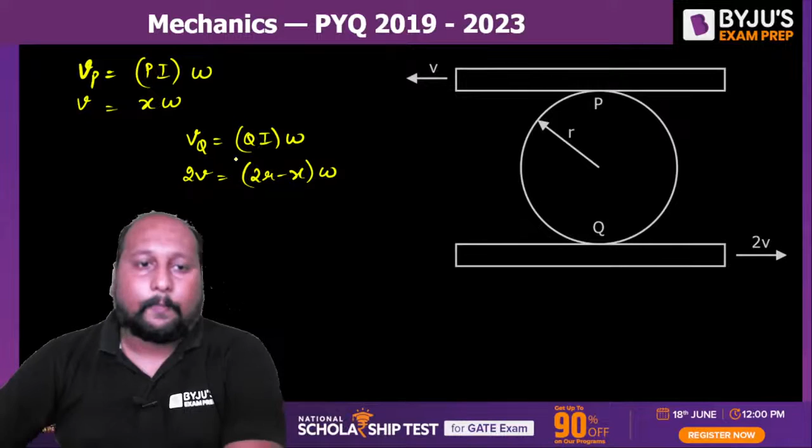And similarly we can say velocity at point Q is 2V, this is your point Q, so Qi into omega. What is Qi? This will be 2r minus X, into omega, and VQ is twice of V. If you take these two ratios, this V will cancel out and you will be getting the value of X.

So let us take the ratio: V by 2V is equal to X into omega divided by 2R minus X. Let us find out where this X will be located. So I can say 2R minus X is equal to 2X. So here we can say X is equal to 2R by 3.

So we got the value of the I-centre from the top portion. Now it's a very easy question. If the top plate and bottom plate have the same velocity, then the I-centre will be exactly at the center point. But because the top and bottom points are not having equal velocity, the I-centre has shifted from the center position.

So we got this X value, so we can simply say V is equal to X into omega. So omega is equal to V by X, so this is 3V by 2R. 3V by 2R is the angular velocity of this particular disk. Option C is the correct answer. Is this clear? A simple question from the concept of your I-centre.

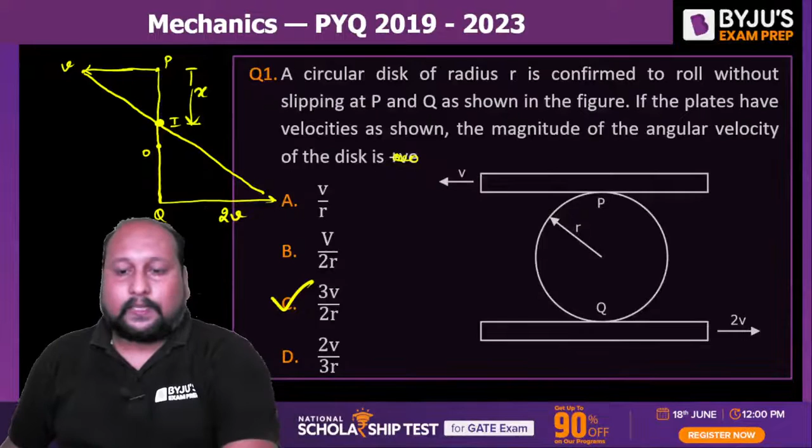Chaliye, second question on the screen. An attempt is made to pull a roller of weight W over a curb that is stepped by applying a horizontal force F as shown in the figure. The coefficient of static friction between the roller and the ground, including the edge of the step, is mu. Identify the correct free body diagram of the roller when the roller is just about to climb over the step. So you have to identify, there are 4 diagrams being given. What will be the correct free body diagram?

Now here it is clearly stated that it is about to climb, that means we can apply the condition of static equilibrium. So which one will be giving us the correct representation of the free body diagram? Option A, B, C, or D? Now it is clearly mentioned that it is at static equilibrium, so definitely can we say that at the hinge point, we'll be having this reaction force.

There's a reaction force R and a weight W acting, so there are 3 forces acting. Simply we can say option C is the correct answer: the reaction force, the applied force F, and the weight W is the correct representation.

We'll be having a normal reaction at this point, which will pass through the center. Because this body is about to climb, we can say this is a condition of static equilibrium. Is this clear, understood? The correct representation is option C.

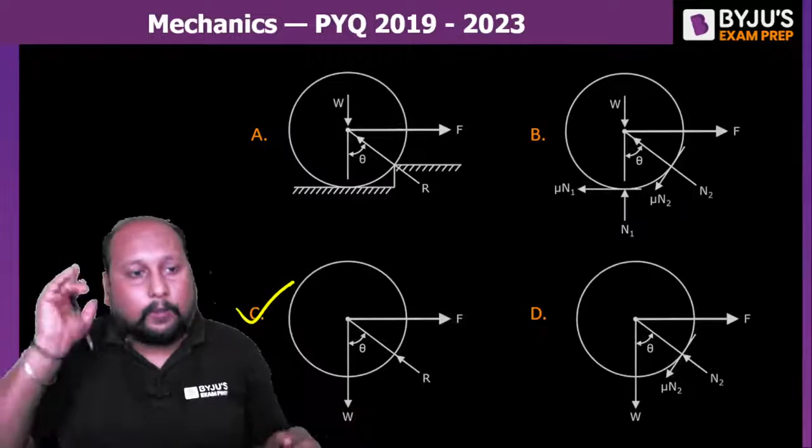Let us proceed to the next question. A beam of negligible mass is hinged at support P and has a roller support at point Q. A point load of 1200 Newton is applied at point R, so there is a force of 1200 Newton at this point. What is the magnitude of the reaction force at point Q? You have to calculate this.

Let us say this is the reaction force RQ, at the roller support. This is a 1 mark question. So tell me quickly, what will be the reaction force RQ? Anyone?

What will be the reaction force RQ? Now we need to calculate the RQ. If you take the moment about point P and make it equal to 0, because this entire body is in equilibrium, we can get the value of this.

So what is this distance? That is 5, so 1200 into 5. RQ, what is this height? That is equal to 4. This is clockwise, this is anti-clockwise, this is RQ into 4. So from here, the reaction at point Q comes out to be 1500 Newton. Are we getting this 1500?

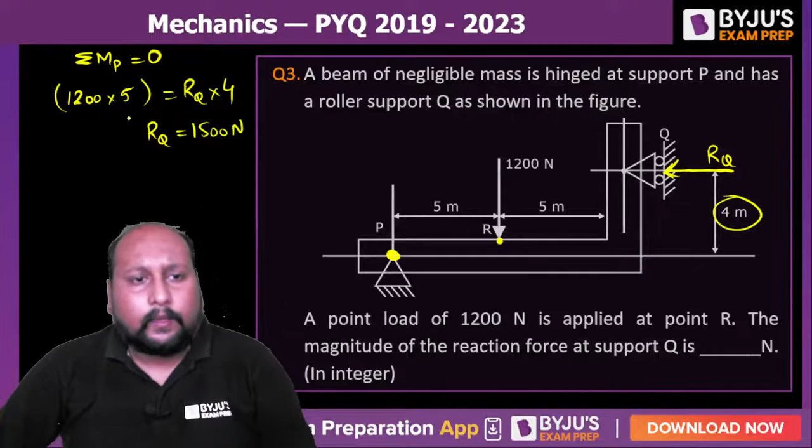1 mark question, 1 mark question. So the reaction at point Q is 1500 Newton. Simple question asked in 2020. Is this clear? Everyone, please do let me know.

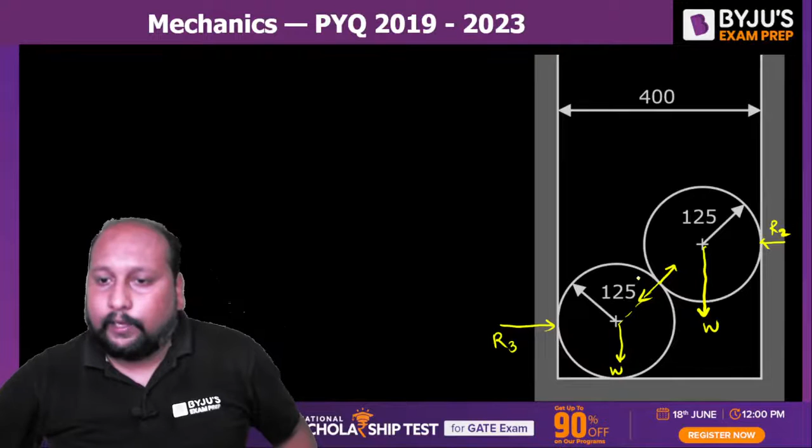So we need to calculate this magnitude of R1, the reaction between the two spheres. The reaction at the point of contact between the two spheres is what we have to calculate, meaning we need the value of R1. How do we do this? Simple - draw the free body diagram, apply Lami's theorem, and get the answer. Let's try this.

Let's try this. Let's say this is sphere A, this is sphere B. If I draw the free body diagram of sphere A, there is a weight W acting downward, a reaction force R2, and a reaction force R1 acting. But I also need to calculate this angle.

What will be the total distance here? This one is 125, this one is also 125, so total distance will be 400 minus 250, which will be the base, and the hypotenuse is 250.

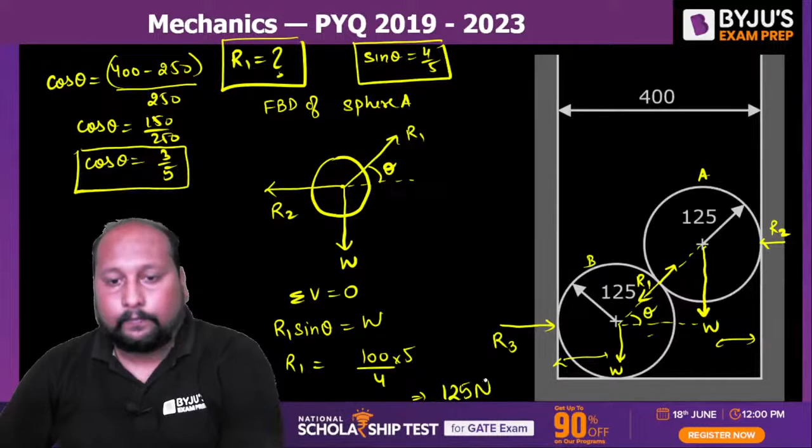Are we getting this, 125 Newton everyone? 125 Newton is the final correct answer. That means the reaction at the point of contact between the two spheres is equal to 125 Newton, and they asked to round off to 1 decimal, but since we get an integer, it's perfect.

Clear? Proceed. Let us proceed to the next question, question number 5 on the screen.

Many times you get easy questions from trusses, and this is one of the easiest. The figure shows an idealized plane truss. If a horizontal force of 300 Newton is applied at point A, we are applying this force at point A. What is the magnitude of the force produced in member CD? You have to calculate the force in this member.

Quickly, what will be the value? Anyone? This is a question which was asked in GATE 2020 for 1 mark.

Whenever you get a truss question, the important concept to remember is to identify any joint where 3 forces are acting. If you visualize at point B, there are 3 forces acting, with 2 collinear forces. If this is point B, this is FAB, this is FBD, and this is FBC. As I've told in previous sessions, whenever a joint has 3 forces where 2 are collinear, the third non-collinear force will always be equal to 0.

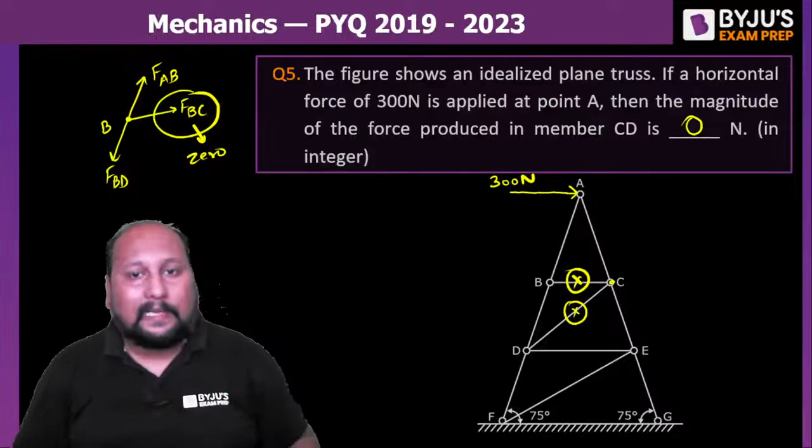All clear? The answer is 0 Newton, and moreover if you try to extend, how many zero force members are there? We have BC, we have CD, DE is also a zero force member, and EF is also 0. So there are 4 members which are zero force.

This is an extension to the discussion of this problem. This NAT problem is a very easy question, its member force in CD is 0. Clear hai? This 0 is too bold, dark ho gaya jada. Okay, chaliye next question.

Question number 6 on the screen. The members carrying 0 force in a truss shown in the figure for any load P greater than 0, with non-appreciable deformation of the truss, that means it's a rigid truss with no deformation happening.

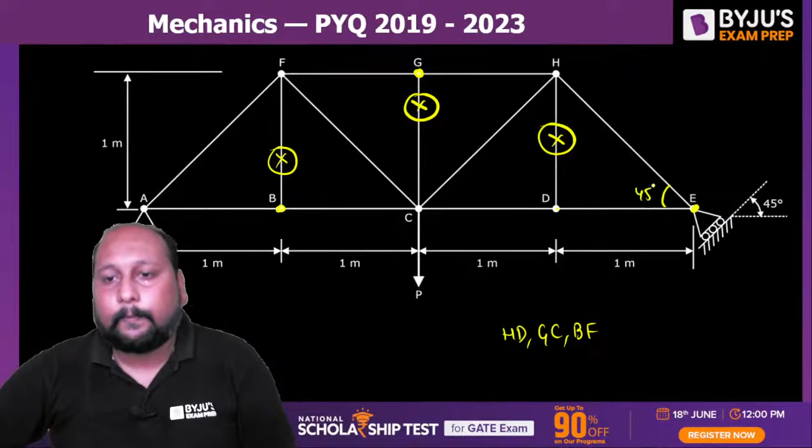Now, if you try to concentrate on joint E, this height and base make 45 degrees, so this is also 45. The height of this truss is 1 meter, and DE length is 1 meter, so the angle made by the member HE with DE is 45, and this support is also making an angle of 45. So can we say the reaction, since this is a roller support with a single reaction, the reaction at point E will be along the HE line?

Okay, so I can simply say if all the reaction force goes toward HE, then DE will be a zero force member. If DE is a zero force member, DE is equal to CD, so this is also a zero force member.

Okay, fine. Is this clear? So now we have DE and CD being added to the zero force members list.

What about the other members? You'll be saying, sir, can we go for GF and GH? If you talk about GF and GH, these are not zero force. These both are equal, but they are not zero force members.

Because why is GF not zero? If you take joint A, AB is non-zero, AF is non-zero. If AF is non-zero, definitely FC and GF will be non-zero. And at point C, this is non-zero, so we can say this is also non-zero.

So in total, we are having 5 members as zero force members: HD, GC, BF, DE, and CD. That is option C. Option C is the correct answer.

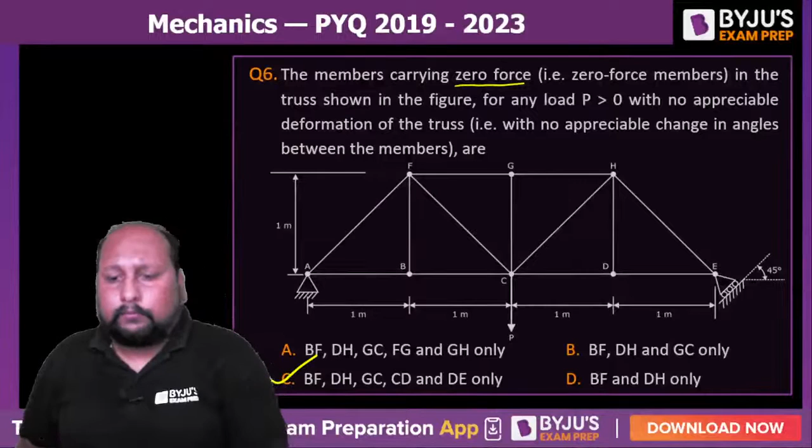Let's move to the next question, question number 7. A plane truss PQRS where PQ and QR are having equal length and PQR is making an angle of 90 degrees as shown in the figure. The force in the members PR and RS respectively are what we need to find.

Can you tell me what will be the answer? Quickly, are you able to see this diagram? Let me hide myself. Quickly, what will be the force in the members PR and RS respectively? Simple question, yes, a simple question.

Now, whenever you get a question from trusses like this, there are two methods we can apply. Either we go for method of joint or method of section. Whenever there are intermediate forces acting, go for method of section. It's the best way, and we'll easily be able to solve the question.

So if you go for method of section, now the challenge is, sir, where do we cut the section? Before cutting the section, if you concentrate at point Q, only two forces are acting there, no applied load, and both forces are perpendicular. Can we say these two are zero force members?

Can we say these two forces, PQ and QR, are zero force? And if these are zero force, now we can take the section like this and remove the bottom portion.

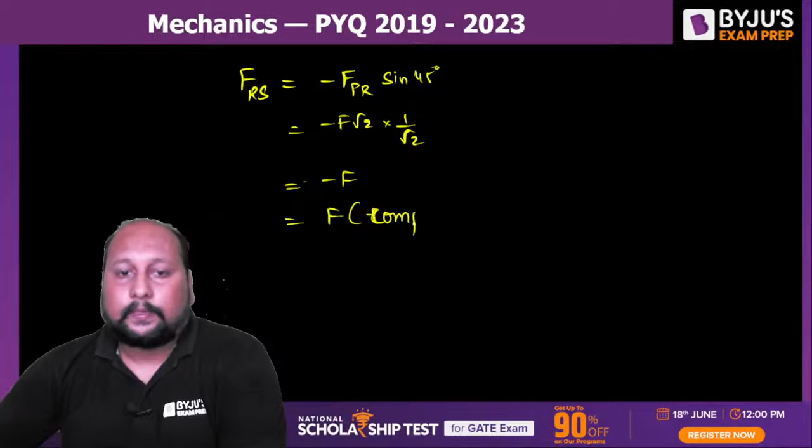So from here, the force in the RS member is equal to minus FPR sine of 45. sin 45 is 1 upon root 2, that is minus F root 2 into 1 upon root 2, that is minus F, that means F is compressive in nature. Minus means compressive, okay fine.

So RS is minus F, compressive. Option D is the correct answer. So the force in member PR is F root 2 tensile, and the force in member RS is F compressive, because we got a negative sign.

Clear? Done? Yes, anyone having any doubt? These are very easy questions, let's go. Now let's proceed. See, mechanics is a subject - if you know the concept, you will never ever have any difficulty. Right? If your concepts are strong, no problem with that. Okay fine, and if your concepts are not strong, then it is a very difficult subject. Let's move to the next question.

Question number 8 on the screen. A block, oh this is a very easy question, you all can tell me within a fraction of 10 seconds I think. A block of mass 10 kg rests on a horizontal surface. The acceleration due to gravity is 9.81 meter per second square. The coefficient of static friction between the floor and the block is 0.2, that means mu value is given as 0.2. A horizontal force of 10 Newton is applied on the block. What is the magnitude of the friction force on the block?

What is the magnitude of this friction force? Definitely this is the direction of friction force, right? This is the weight, that is 10g, and this is your normal reaction. Okay quickly, what will be the magnitude of the friction force? First let us try to understand, are we talking about a static condition or a dynamic condition? For that, let us calculate the limiting value.

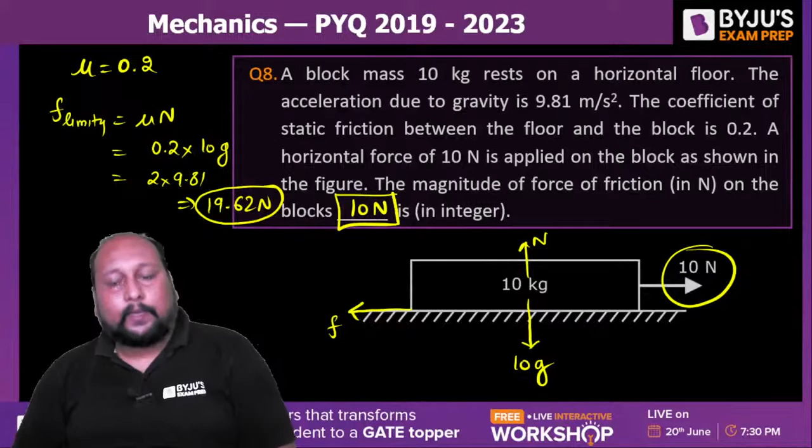Okay clear? Yes, because we know that if you try to draw the graph between the applied force and the friction force - this is the limiting point, right? This is the limiting point and this is dynamic. We are talking about this point, 10 Newton applied, friction is also 10 Newton.

Okay, question number 8 done. Question number 9 on the screen, a very easy question. A block of negligible mass rests on a surface that is inclined at 30 degrees to the horizontal. When a vertical force of 900 Newton and a horizontal force of 750 Newton is applied, make sure the block is having negligible mass. What should be the coefficient of static friction between the block and the surface? Very easy question, apply and tell me what is the answer.

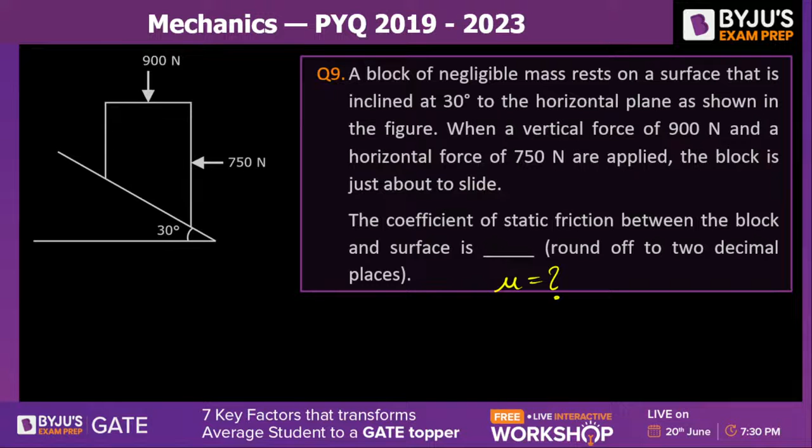Quickly, what is the value of this coefficient of static friction? This is a very easy question guys. Let's try this, now let us draw the FBD. Let us draw the FBD - this will be the normal reaction, something like this. Now tell me one thing, 0.83, okay anyone else who has solved this? One second guys, anyone else who has solved this question?

Yes, 0.83, anyone else who has given me? Let's try this question, it's easy. Now first of all tell me what will be the direction of friction.

See, the block is not having any mass, only the applied force is acting. So tell me what will be the direction of friction. For that we have to see what is the magnitude of these forces.

So let us resolve this along the inclination. This will be 750, this is 30. So 750 cos 30, and downward will be 750 sin 30.

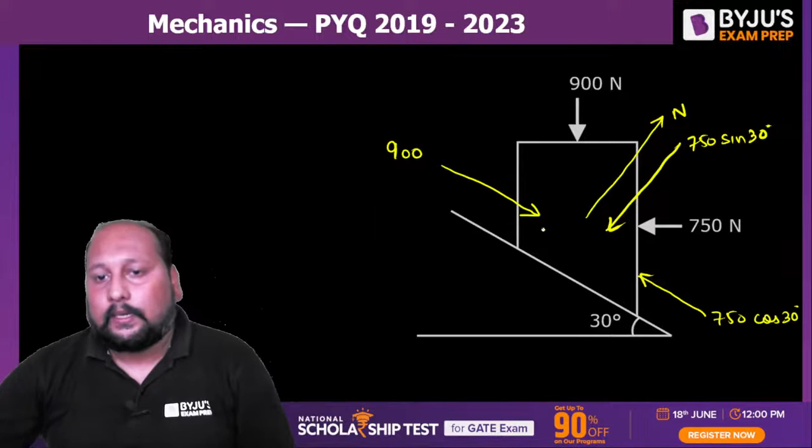Similarly, we are having 900 along this direction. This is 900, now this is 30. So what will be this value? This angle will be 30, this is also 30, so this is sin 30. Okay, sin 30, and this one is downward direction, 900 cos 30. Okay, so I have resolved all the forces.

So tell me, by seeing the magnitude of these two forces, what will be the direction of friction? Quickly, tell me. Now if you see 900 sin 30 is 450 Newton, somewhere around 450. Let's try to find out what's the value of 750 cos 30.

So this is 649. That means the net force is in the upward direction. If net force is upward, that means the direction of friction will be downward. This is the direction of friction. Is this clear? See, here's where mistakes happen in identifying the direction of friction.

Sin 30 is 1/2, 450 Newton force downward, down the inclination. 750 cos 30 is somewhere around 650 Newton, which is upward. So definitely there's a total force acting in the upward direction. So the opposite to the direction of motion will be the friction force. So now you can easily calculate.

So I can say the normal reaction will be equal to 900 cos 30 plus 750 sin 30. Okay, fine. So from here let us calculate this value: 900 cos 30 plus 750 sin 30. Okay, so this is coming out to be 1154.42 Newton. Now if I talk about the frictional force, because F is equal to mu into N, we have to calculate the value of mu.

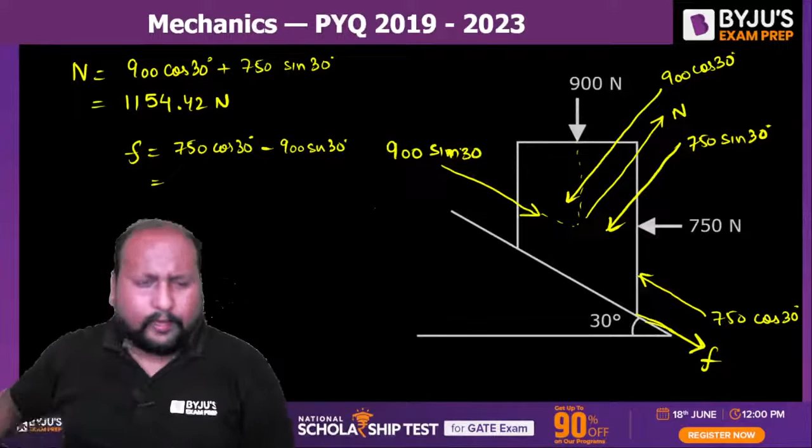So I can say friction force will be equal to 750 cos 30 minus 900 sin 30. Let's calculate this magnitude. 750 cos 30 minus 450, that is coming out to be 200, somewhere around 200. 199 means 200, 199.52 Newton. Okay, so F is equal to mu into N.

Mu is equal to F by N, just we have to place it. 199.52 divided by 1154.42, somewhere around, what's the value? It is 0.1728, round off to 3 decimals, 0.173 is the final correct answer.

0.173 is the final correct answer. Okay, so the answer is 0.17. Is this clear? Anyone having any doubts? Surya, is this clear? 0.17. Okay, to 2 decimals, 0.173 is the correct answer. 0.17 we can mark it.

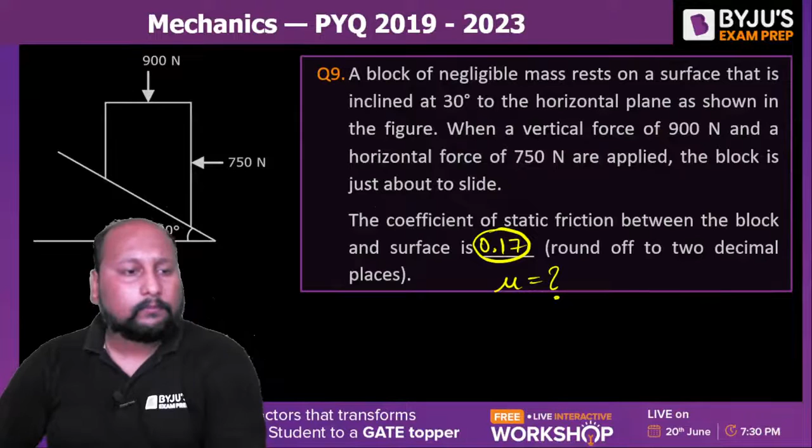Here we have to apply the conservation of energy, because whatever kinetic energy we are providing is converted into potential energy, as we are stretching that particular cord by a distance of 0.4 meters. So we can apply the concept of conservation of energy and solve it, and let's see what is the answer.

Okay, so applying the conservation of energy: whatever is the total kinetic energy, if I take this as the total kinetic energy plus the total potential energy, is exactly equal to the total kinetic energy plus the total potential energy. So this is half into m into v square is equal to half into k into x square.

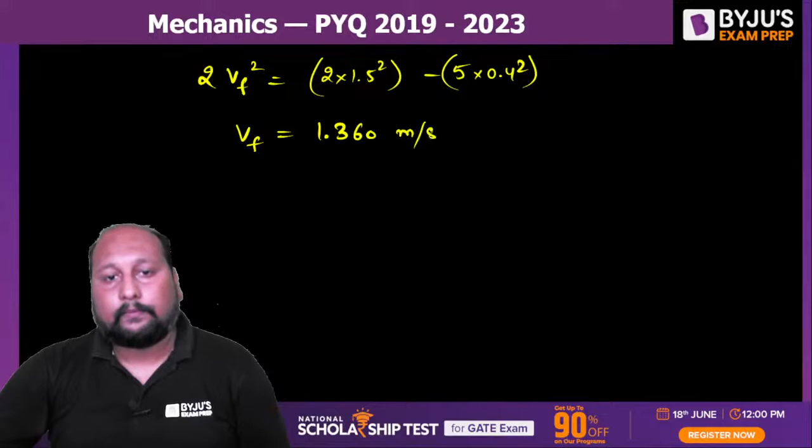So I think option A is the correct answer. Option A is the correct answer. Okay, fine, clear hai? Option A is the correct answer. Simple, we have to apply the energy conservation and get the final result.

Chaliye, very good. Next question on the screen, question 11. Arey, bahut easy. This is also, when I was, the easy question.

The wheels and the axle system lying on a rough surface. Rough means there's a friction we need to take into consideration. So there is a wheel and an axle. Two wheels are connected, and in between it is an axle. So the question is, each wheel has a diameter of 0.8 meter and a mass of 1 kg. Assume that the mass of the wheel is concentrated at the rim. That means we are talking about the wheel as a rim type. Neglect the mass of the spokes.

Diameter of the axle is 0.2 and its mass is 1.5 kg. Okay, so the axle has a mass of 1.5 kg and diameter of 0.2. Neglect the moment of inertia of the axle. Assume g is equal to 9.8. The effort of 10 Newton is applied on the axle in the horizontal direction as shown in the midspan. Okay, this effort is applied. Assume that the wheels move on the horizontal surface without slip. What is the acceleration of the axle system in horizontal direction?

Simple question, it's a very easy question. If you try to visualize, the mass of each wheel is 1 kg. There are two wheels being connected, so the total mass of the wheels will be equal to 2 into 1, that is 2 kgs, and the mass of the axle is equal to 1.5 kg. So the total mass of the system will be equal to 2 plus 1.5, that is 3.5 kg. If I take the entire system to be a single system, we have a total of 3.5 kg, right? So now we can apply the simple concept.

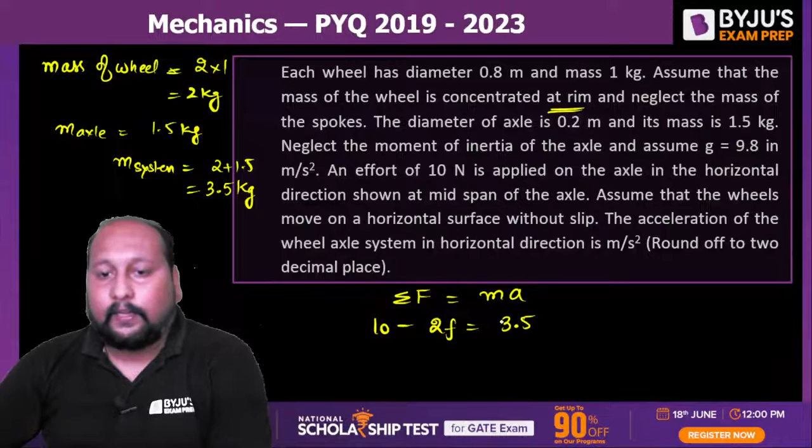So can we say that the total force acting on this body is equal to mass into acceleration? Now what's the total force? 10 Newton is the force acting in the horizontal direction, minus — now there are two wheels, a friction force created over here, friction force created over here — that is minus 2F is equal to mass into A, 3.5 into A. So 10 minus 2F is equal to 3.5 into A.

A, can I write as R into alpha? Right, what is the radius? Diameter is 0.8, so radius will be 0.4. So 3.5 into 0.4 into alpha equals 10 minus 2F. So after this we are getting one equation: 10 minus 2F is equal to 3.5 into 0.4, that is 1.4 alpha. Let us say this is equation number 1.

Alpha is angular acceleration. Okay, now if you try to apply the moment, the torque equation — this is the frictional force, and this is the force acting, 10 Newton force. This is 0.1 meter, I think 0.1 meter only. Yeah, 0.2 meter is the axle, so 0.1 meter. So I can say the total torque acting is equal to I into alpha.

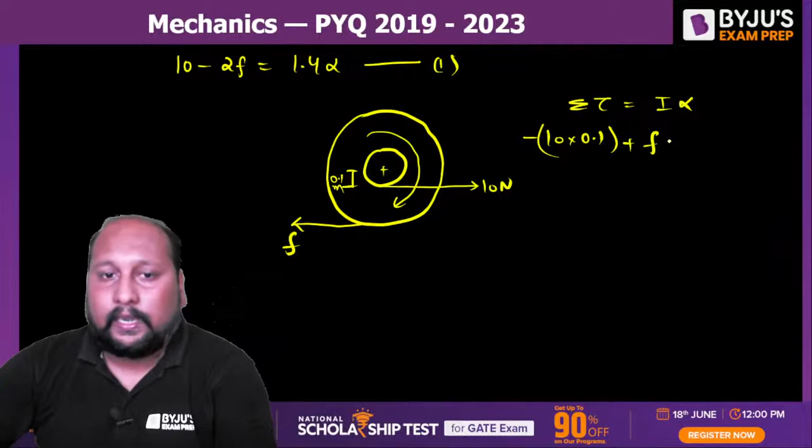What's the total torque acting? This is the direction of motion. So I can say the 10 Newton will be creating an anti-clockwise movement. So this is minus 10 into 0.1 plus F into radius 0.4, that is equal to I into alpha. I is, since this is a disc...

Right, this is a rim, they have already stated this. So we can say mr square, and because there are two wheels, we can say 2 into mr square into alpha.

So this will be minus 1 plus 0.4f is equal to 2 into mass is 1 kg, radius is 0.4 square into alpha. So this is equal to 0.4f minus 1 equal to 0.16, 0.32 alpha. That's equation number 2.

Can we solve these two equations to get the value of f and alpha? This is equation number 1, this is equation number 2. Solving these two equations, we get the value of friction is equal to 2.61 Newton, and the angular acceleration comes out to be, when you place this value, 3.409.

Yes, John Philip, 3.409 radian per second square. Okay fine, so we got the value of friction, we got the value of alpha.

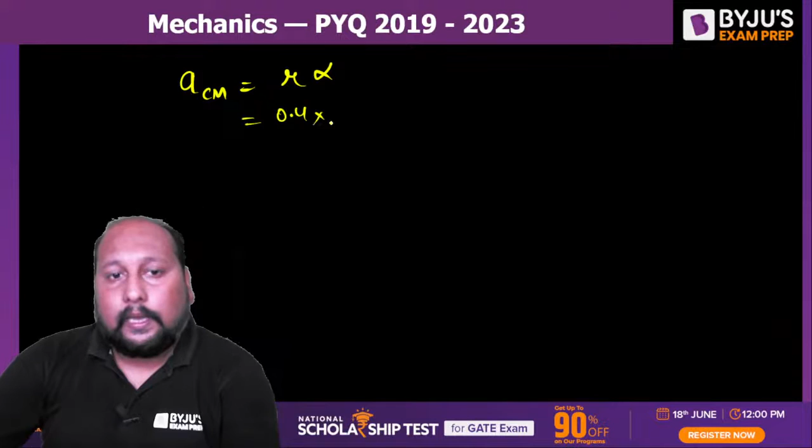Question is, what is the acceleration of the axle? So in the horizontal direction, that means what is the acceleration of the center of mass? That is equal to R into alpha. R is 0.4, alpha is 3.409. Let's calculate and tell me what's the answer.

Till then, let me clarify the doubt of John Philip.

1.3636 meter per second square.

Are we getting this? Sir, how are NIT, Trichy, Surathkal and Warangal compared to new IITs like BHU?

Now, if you see the latest NIRF ranking, you will get complete clarity. The government released an NIRF ranking 2 weeks back, and you can see research-based ranking, overall institute ranking, different categories. Based on that, you can get a clear idea. If you want to see a research-oriented institute, you can sort it according to research.

NIT Trichy is the topmost. I can rather say Trichy, Surathkal, and Warangal, these three are the top NITs, much better than the new IITs. In terms of placement only, I'm saying, not talking about research based. Research based also is good, but in terms of placement, these are much better than the new IITs.

But last 2 years, the trend is slightly shifting. Some new IITs have done marvelous work, so their ranking has improved in a great way. So new IITs try to work on placement because they want to improve their ranking. So it's not too bad to get into a new IIT, but yes, you have to compare with these three NITs according to the ranking.

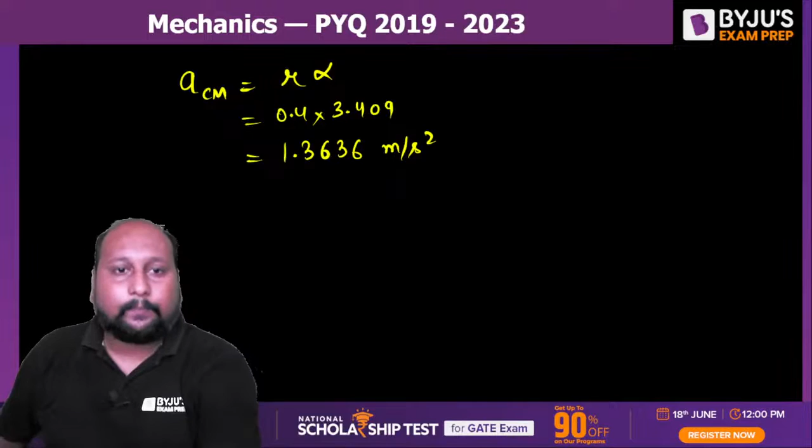Okay fine, chaliye, next question on the screen. I hope this is clear. The answer, down to 2 decimals, is 1.36 meter per second square.

Next question. A ball of mass 3 kg moving with a velocity of 4 meter per second undergoes a perfectly elastic direct central impact with a stationary ball of mass m. So we have a ball of mass 3 kg moving at 4 meter per second, having a perfect elastic collision with mass m initially at stationary. After the impact is over, the kinetic energy of the 3 kg ball is 6 joule. What is the possible value of this mass m?

Can you tell me what could be the possible value? This is an MCQ, not an MSQ problem. What is the possible value of this mass m?

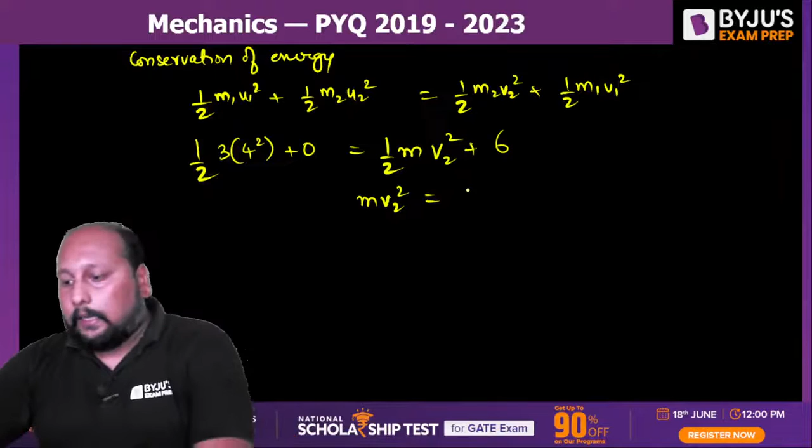16 into 3 minus 6, let's check. Are we getting this? mv square, 3 into v square. We have to have that half also, or else we won't get the correct answer. So this is 48, that's 54. Are we getting this 36? 16 into 3 is 48, divided by, this is 24, 24 minus 6 is 18, 18 into 2, 36. Yes, this is 36. So this is equation number 2.

So this is equation number 1, but the thing is, in equation number 1 we have 3 unknown variables, and in equation number 2 we have 2 unknown variables. So how can we proceed? What we can do is write instead of this, 3v1 plus mv2 is equal to 12, as equation number 1. We have to calculate the value of mass m, so we have to frame a quadratic equation.

One more thing, we are having a direct perfect elastic collision. Can we say e equals 1 is equal to v2 minus v1 divided by u1 minus u2? So v2 minus v1 is equal to u1, which is 4. So this is equation number 3. Let me write v2 is equal to v1 plus 4. This is equation number 3, and this is equation number 1.

So what we can do is place this value into this equation and frame the equation out. Let's eliminate v1. V1 is equal to v2 minus 4. Placing this here, 3 into (v2 minus 4) plus m into v2 is equal to 12. So we can solve this.

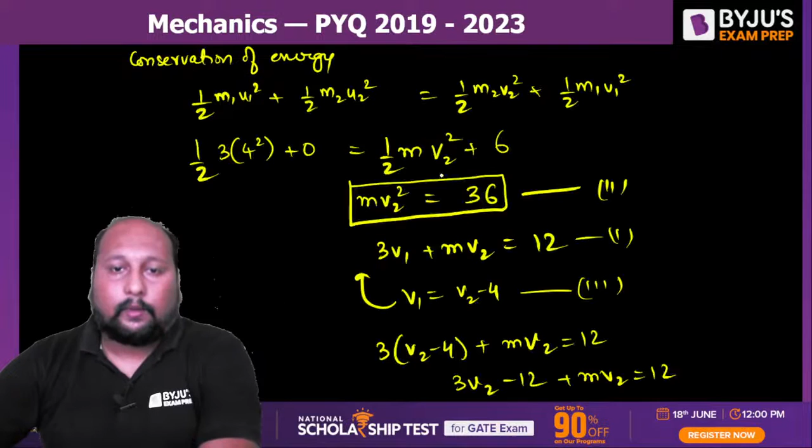36 by m is equal to 24 square by 3 plus m, right? So this is 6, this is 4, and this gets cancelled out. So ultimately we'll be framing one equation, we can square this one too. We'll be getting a quadratic equation: m square plus 9 plus 6m, into 36, is equal to 24 into 24 into m.

So this is 4, that is 16. So we can say m square minus 10m plus 9 equal to 0. So m square minus 9m minus m plus 9 equal to 0. So (m minus 9) into (m minus 1) equal to 0. So mass is equal to 9 and 1 kgs. We are getting two values, 9 and 1 kgs.

So option B is the correct answer. Is this clear, everyone? 9 and 1 kgs is the final correct answer to this problem.

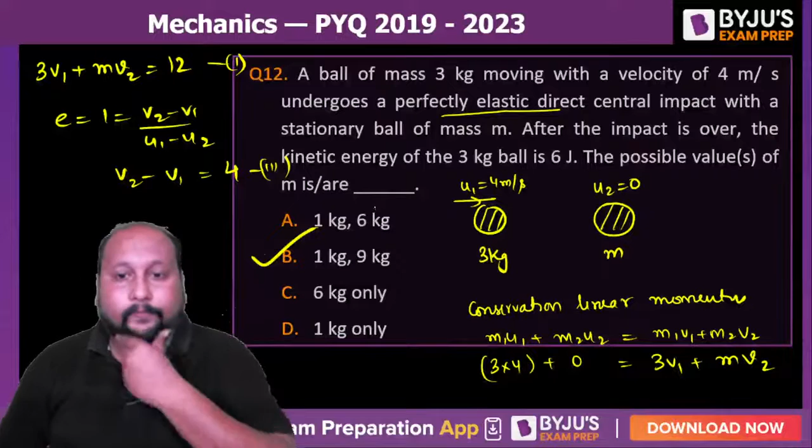Again, this is a question where we have to apply conservation of momentum and conservation of energy. A rigid block of mass m, 10 kg, having velocity of 2 meter per second, strikes a stationary mass of 30 kg after traveling 1 meter along a frictionless horizontal surface as shown in the figure. The two masses stick together and jointly move a further distance of 0.2 meter along the same frictionless surface before they touch a massless buffer connected to a rigid vertical wall by a linear spring with spring constant 10 to the power 5. What is the maximum deflection of the spring in centimeters?

That means the combined M1 and M2 collectively moves and hits this spring — what is the maximum deflection happening in this spring? Very simple: we have to apply the concept of conservation of momentum, and we can also apply conservation of energy. Both can be applied. Let us first apply conservation of momentum because we need to identify the velocity with which this combined body will be hitting the surface. Let us apply the conservation of momentum.

Let us apply the conservation of linear momentum. Initially this is at zero velocity, so we can say m1 v naught plus m2 into 0, and since they are sticking together, this will be equal to (m1 plus m2) into velocity v.

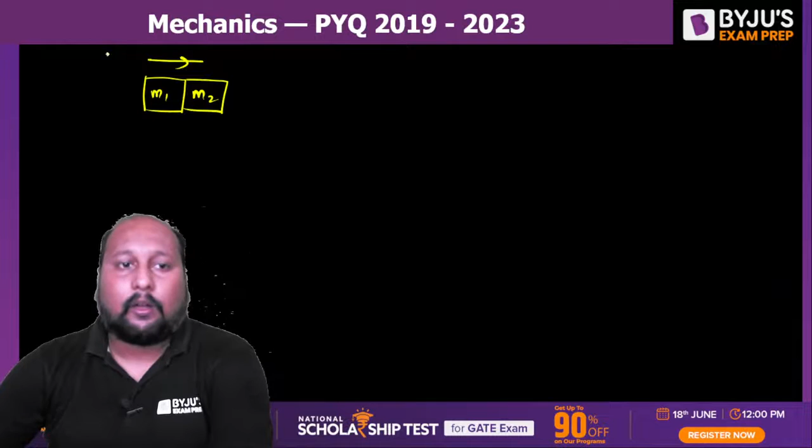The entire combined mass m1 and m2 is moving with a velocity of 1 by 2 meter per second and hitting this spring surface. When they hit, all the kinetic energy will be converted into potential energy stored in the spring.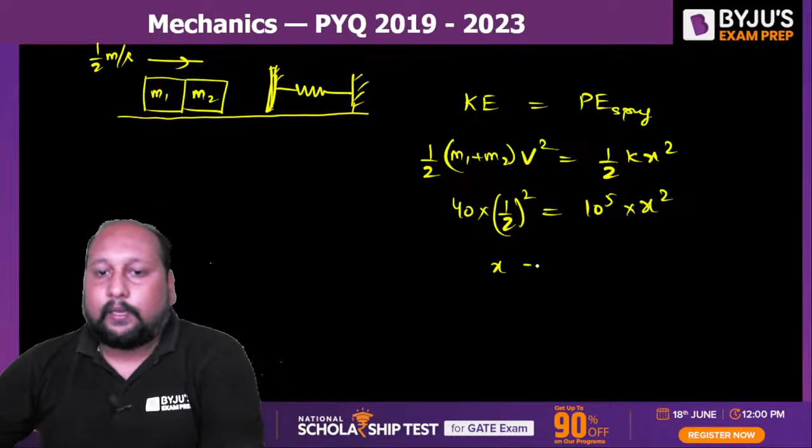So the total kinetic energy equals the potential energy stored in the spring: half into (m1 plus m2) into v square equals half into k into x square. So (m1 plus m2) is 40, v is 1 by 2 whole square, equals k value 10 to the power 5 into x square. From here, x square equals 4 into 10 divided by 10 to the power 5, which is 10 to the power minus 4, so x equals 10 to the power minus 2 meter. They are asking for the value in centimeters, so that's 1 centimeter. The maximum deflection in the spring will be 1 centimeter.

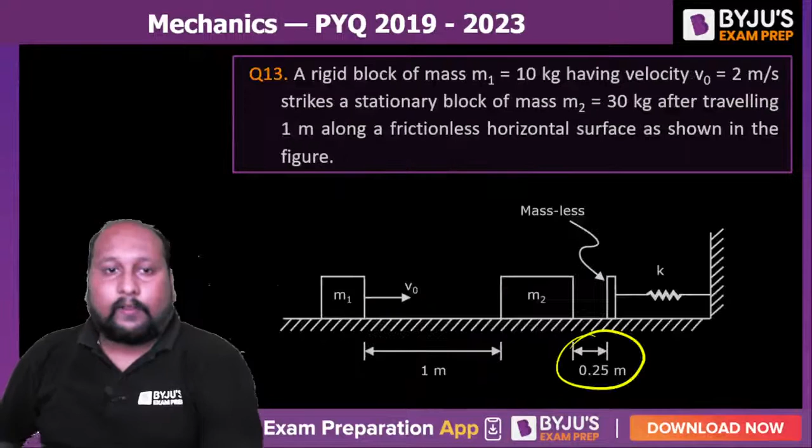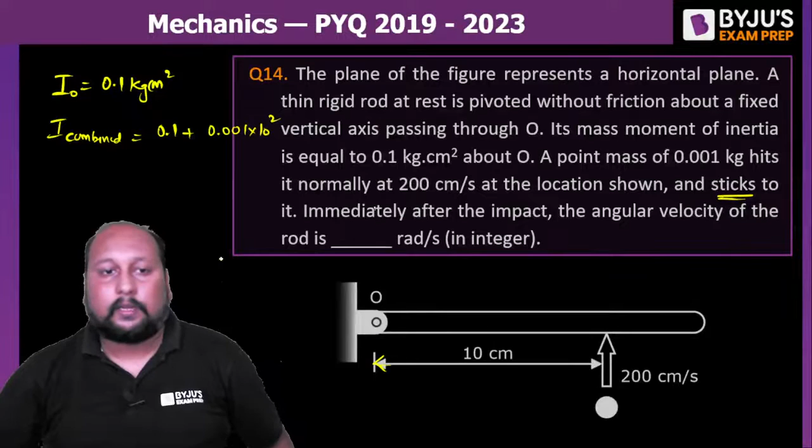So solving this, it will be 100, 0.2. This is 0.2 kg centimeter square. So I got the moment of inertia of the combined body. It is sticking, okay, so I got that value.

Now we can apply the law of conservation of angular momentum. Applying the law of conservation of angular momentum, it's basically m into v into r is equal to whatever your momentum, angular momentum that was with this particular mass, after hitting it will be transferred, that is equal to the combined moment of inertia into omega.

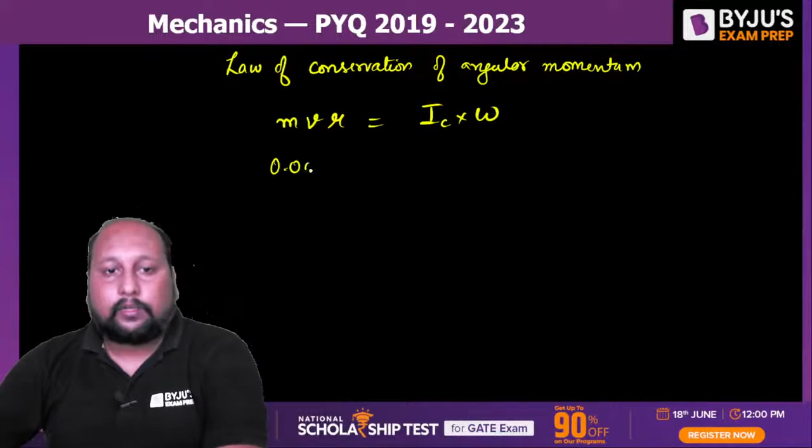Yes, so what's the mass? That is 0.001, velocity is 200, radius is 10, combined moment of inertia is 0.2 into omega. So omega value, quickly, what is the value you're getting? Anyone who has tried this, solve this, tell me. What is the value of omega? Simple calculation, guys, one second.

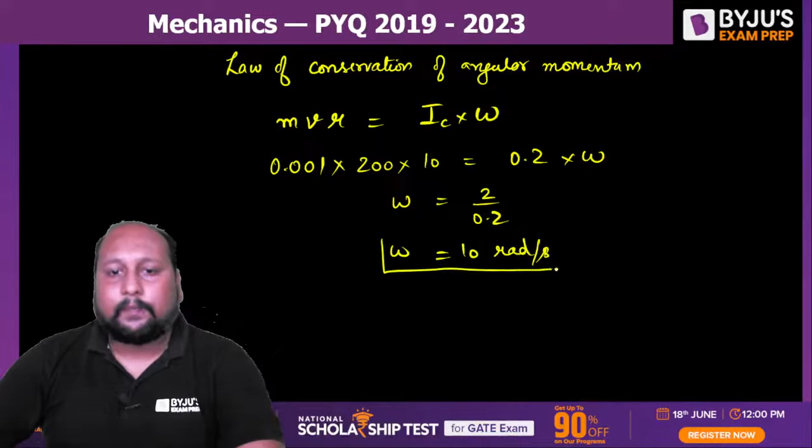Are we getting the angular velocity as 10 radian per second? Everyone? 10 radian per second is the final correct answer. This is 10 because they're asking in integer only. So 10 radian per second is the final correct answer.

Okay, fine. Chalo, question number 15 on the screen. A structure along with the loads applied on it is shown in the figure. The self weight of all the members is negligible and all pins are frictionless. AE is a single member.

Try to visualize, it's not that, this is a single member. AE is a single member which contains a pin C. Likewise, BE also a single member, right, that contains point D. The member GI and FH are overlapping rigid members. The magnitude of the force carried by CI, what is the force in the CI member?

Now, let us suppose if this AE is not a single member, if I say AC and CE were different members, then CI was a zero force member. But as your AC and CE is basically a single member only, that is the reason we cannot say directly that this is a zero force member. We have to do the analysis, right?

So now again the truss problem, what we have to do? We got truss problem, we have to go for method of section, right? So now let us try to take the method of section, try to cut the section from here. CI we need to calculate, right? Let's cut the section from here, or else we can cut the section from here also. Better we can cut the section from here, it will be much more easier.

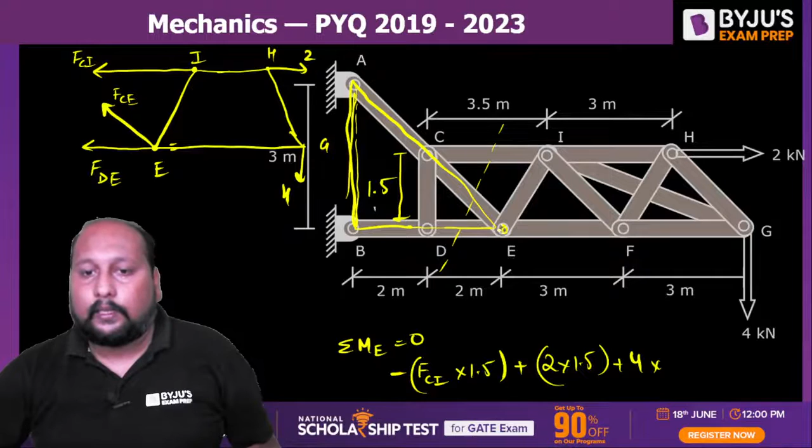So FCI into 1.5, this is in the anti-clockwise direction, plus 2 into 1.5 clockwise direction, plus 4 into this point, 3 plus 3 is 6, equal to 0. So solving this, FCI is equal to 24 plus 3, 27, 27 divided by 1.5, that is equal to 9 by 0.5.

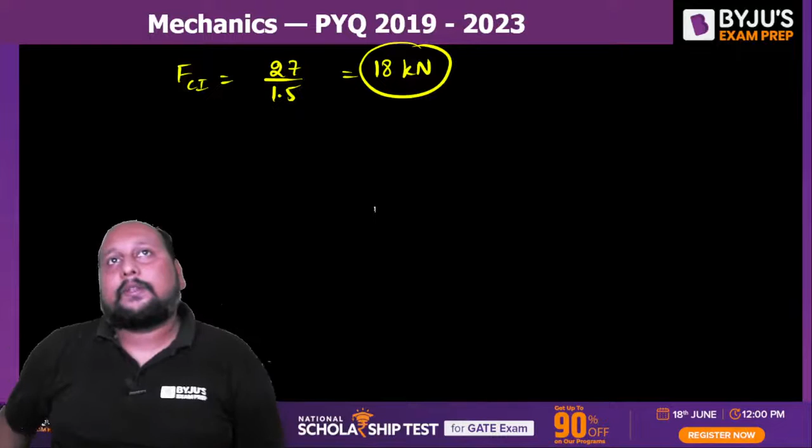That is 18 kilonewton. Are you getting 18 kilonewton? 90 divided by 5 is 18. So the answer for this is 18 kilonewton is a correct answer. Clear hai? Okay.

Chaliye, perfect. Question number 16 on the screen. Two rigid massless rods PR and RQ are joined at the frictionless pin - so I can say pin at R. So R is a frictionless pin joint resting on P and Q respectively, as shown in the figure.

The vertical force acts on the pin as shown in the figure. When that included angle is less than 90, the rod remains in static equilibrium due to Coulomb's friction between the rods and the ground at location P and Q. When theta is equal to 90, we are having an impending slip - that means we are having impending motion, that means about to occur, the motion is about to occur.

You have to tell me what is the ratio of friction at point Q to that of P, that means mu Q divided by mu P. This ratio you have to calculate till 2 decimals. Easy question, try this quickly and do let me know what is the correct answer.

Easy question. Now as this is 90 degrees, let us draw the diagram, that will be much more easier for us. So we are having this as point R, this is point P, this is your point Q. This is F, force acting. This is 90 degree.

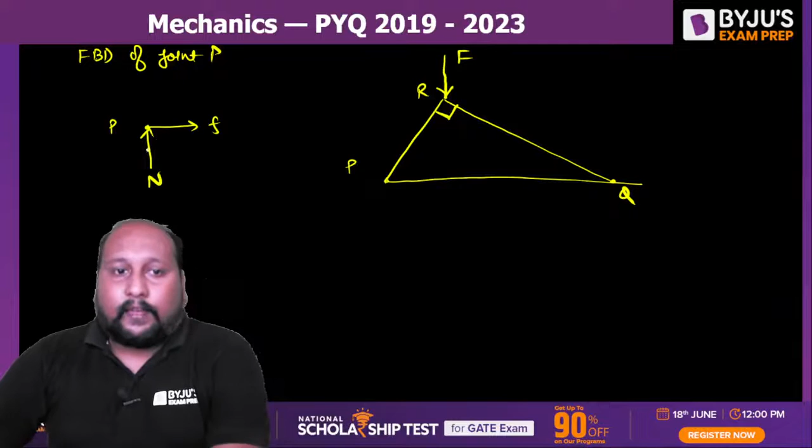So once we go for it, let us try to take the free body diagram of joint P. If I draw the FBD of point P, I can see that there will be a friction force acting on the right hand side, this is point P only. There is a normal reaction acting, right? If I draw it like this, this is the frictional force, and this is the normal reaction, and this will be the force in the member FPR.

Now when this is 90 degree, it is clearly stated that this is having an impending slip, that means the body is still in equilibrium. So can I say the resultant of these two forces will be acting in the exact same line of action of that of PR? If the body is not moving, it's a static equilibrium, that means the resultant of these two, the normal reaction and the friction force, that is R, will be making the same line of action as that of PR.

And what is the angle made by PR? Let us suppose this angle is alpha. So can I say this is alpha? If this is alpha, this is also, but this is 90 minus alpha.

Now you can apply the concept where alpha is the angle of friction at point P. So I can say tan alpha or tan of 90 minus alpha is equal to mu P - can we say, by tan phi is equal to the coefficient of friction? So can I say the angle between the resultant and the normal reaction is the angle of friction? Over here it is 90 minus alpha. So can I say this is cot alpha is equal to mu P. Let us say this is equation number 1.

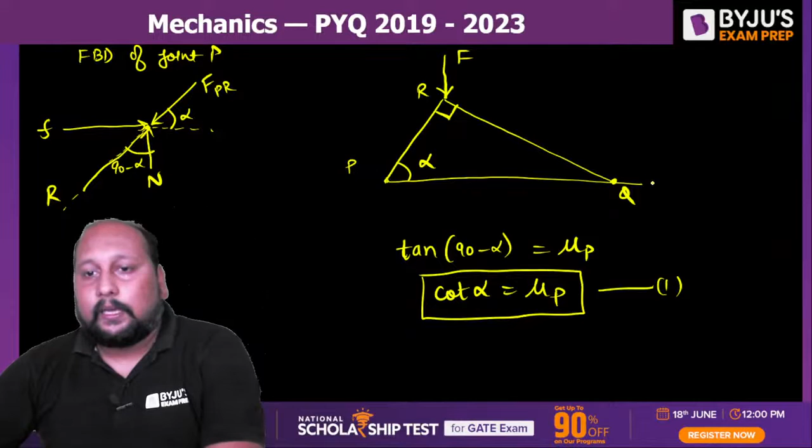Okay, similarly can we go for point Q? Now at point Q force being applied, so friction force will be in this direction. If I take a free body diagram of point Q, so we are applying a force, the body tries to move to the right side, the friction will be on the left hand side. This is your point Q, this is your frictional force acting, this is the normal reaction, and there's a force FRQ in this direction - this is FRQ.

So the resultant will be in the same line of action as this, right? And this angle, let's suppose this is beta. So this angle is beta, so this is 90 minus beta. So over here I can say tan of 90 minus beta is equal to mu q, that is cot beta is equal to mu q, right?

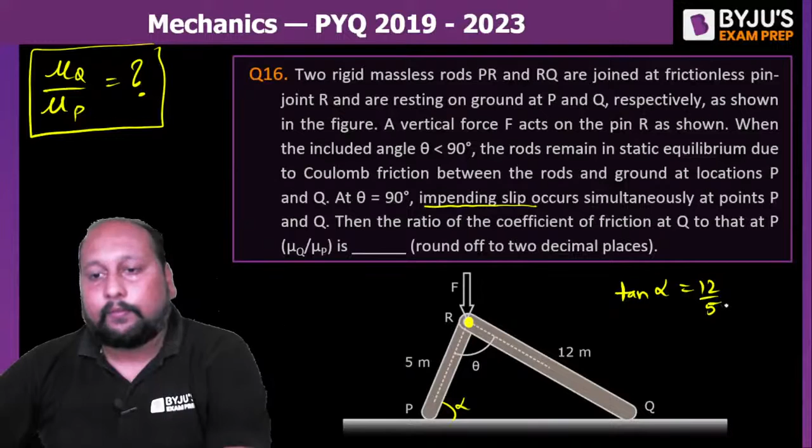So if I manage to calculate the value of cos alpha, cot alpha and cot beta, I'll be getting the value of this ratio. Now, looking at this equation, if this is alpha, what is tan alpha? Tan alpha is equal to 12 by 5. If I say this angle is beta, because this is 90 degrees, I can say tan beta is equal to 5 by 12, right? So let us place it over here.

We need to calculate the ratio of mu q by mu p. Mu q by mu p is equal to cot beta by cot alpha, that is tan alpha by tan beta, right? What is tan alpha? Tan alpha is 12 by 5. Tan beta is 5 by 12. So this is 144 by 25. So mu q by mu p value is 144 by 25.

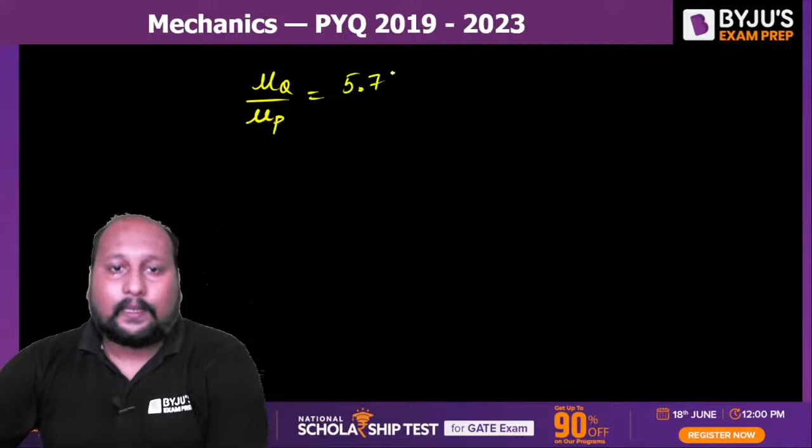What's the value we're getting? 144 divided by 25 is 5.76, up to 2 decimals. So 5.76 is the final correct answer to this problem. Clear? 5.76 is the final correct answer.

Okay, question 16 done. So shall we proceed to the next problem? Yes, correct, let's proceed. Question number 17. Only 5 more questions are left.

A cylindrical disc of mass 1 kg and radius 0.15 was spinning at omega. This is a very interesting question, I think GATE 2022 — this question was asked in GATE 2022. There was a disc which was initially rotating at 5 radians per second, and when it is placed on a horizontal surface and released, that means initially it was rotating.

It was not in contact with the surface, rotating at 5 radians per second. With that rotation, it is just placed. Now, gravity G acts vertically downward as shown in the figure. The coefficient of friction between the disc and the surface is finite and positive, disregarding any dissipation except that due to friction between the disc and the surface. What is the horizontal velocity of the center of the disc when it starts rolling without slipping?

Very simple question. We have to apply the conservation of angular momentum. Let me try to make you understand — actually, when it was rolling, okay, let me draw one diagram. Let's say this is the horizontal surface.

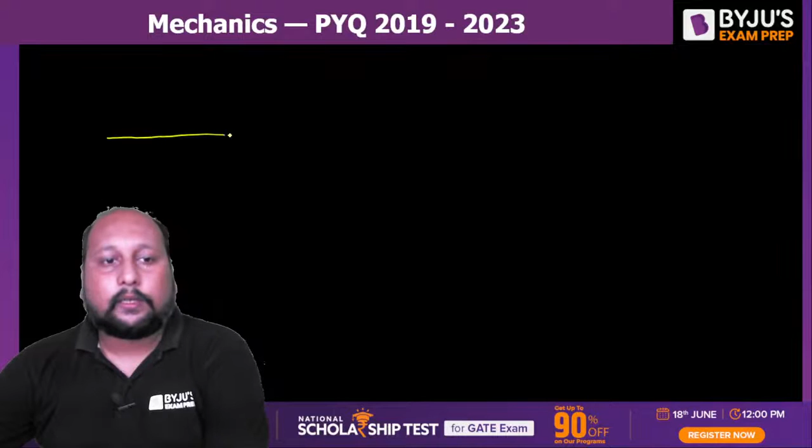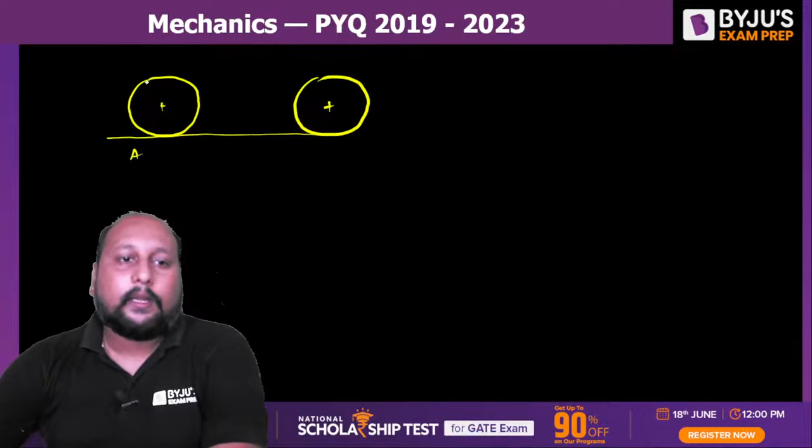It was rolling with an angular velocity of 5 radians per second. It is placed at this moment — let's say this is the point at which I am placing it. So after some time, it will be moving ahead and will have some slipping. After some point of time, it will have a no-slip condition. At this point, let's say this is point A. Right, this is an angular velocity of how much? I think omega, that is equal to 5 radians per second.

At this point, we will be having omega, let's say, which we need to calculate. We need to calculate the velocity — we don't need to calculate the angular velocity, we need to calculate the linear velocity. Easier. So can we say, if I apply the law of conservation of angular momentum...

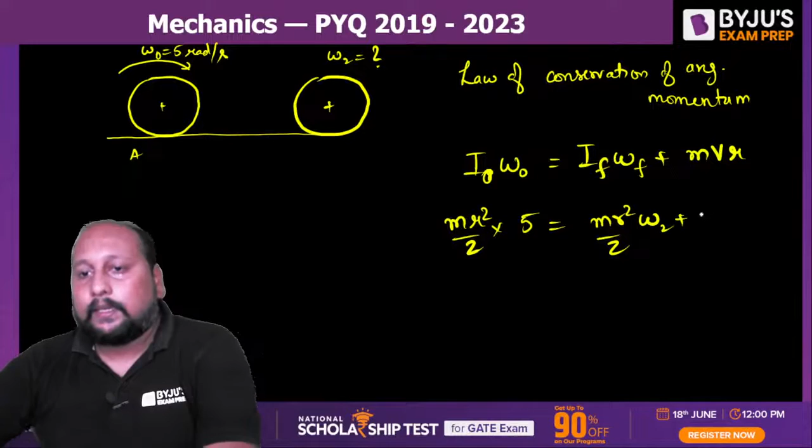Law of conservation of angular momentum: the initial moment of inertia I0 into omega, about point O — let's say this is omega naught — should be equal to the final moment of inertia plus mv into radius r. So initial is, this is a disk, mr square by 2, omega naught is 5, is equal to final will be mr square by 2 into omega 2 plus m into omega 2 r square, that is mr square into omega 2.

So this is 3mr square by 2 into omega 2, equal to mr square by 2 into 5. Solving this, the mr square term gets cancelled out. So omega 2 is equal to 5 by 3 radians per second.

I need to calculate the value of linear velocity. So linear velocity v is equal to r into omega. Radius is 0.15, omega is 5 by 3. Solve it and tell me what value you're getting — 5 by 3 or 5 by 2? Let's check... oh, it's 5 by 3, not 2.5. This is 5 by 3.

5 by 3, right? So 5 by 3. This is 0.05. This is 0.25 meter per second. So the final correct answer is 0.25.

And if you try to see, majority of the questions in engineering mechanics, they are NAT problems.

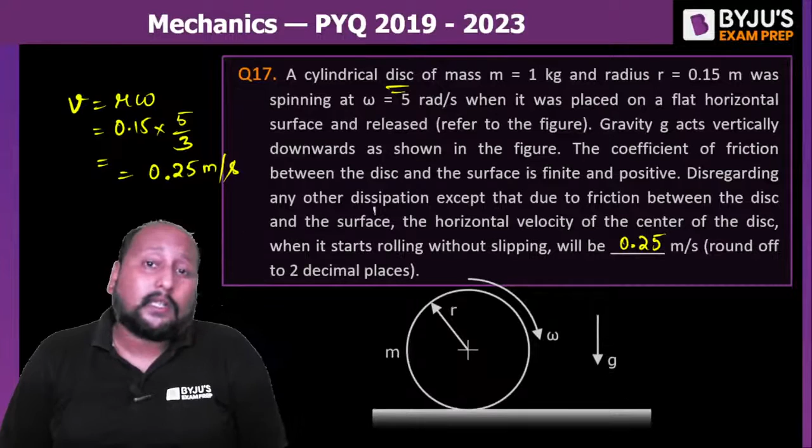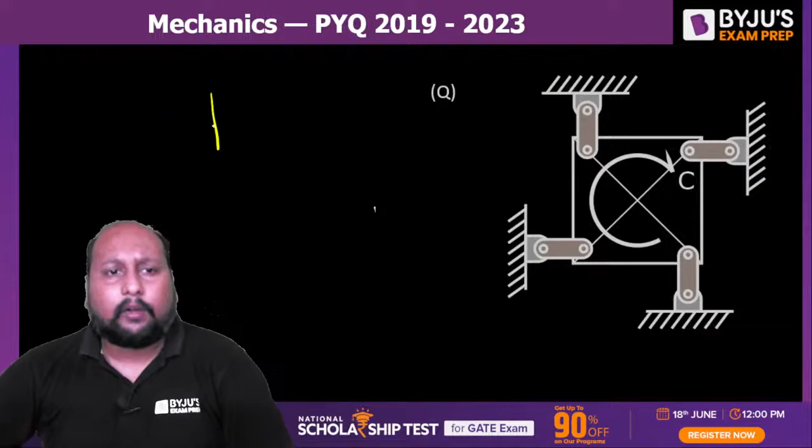Let us go with configuration Q. If you try to see, there's a force acting. If I try to draw the FBD, we're having forces R, R, R, and R. So net horizontal force equals net vertical force, perfect. The net force is equal to 0. And also these reactions will create a counterclockwise moment, while the applied couple is clockwise. So this will be nullified. This system is an equilibrium condition. So Q is an equilibrium.

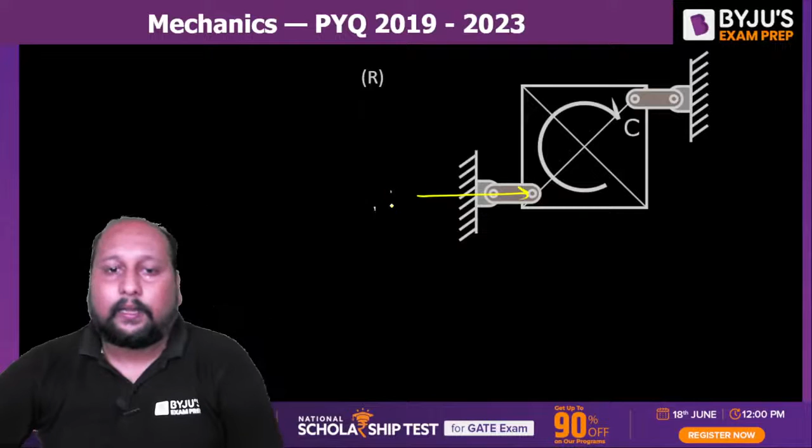Option B is correct. Let's go with configuration R. Now if you see configuration R, equal and opposite forces will be acting. We'll be having a force R and R acting, and this 2R will create a counterclockwise moment which will nullify the clockwise moment. Again, this is an equilibrium condition. So this is also correct.

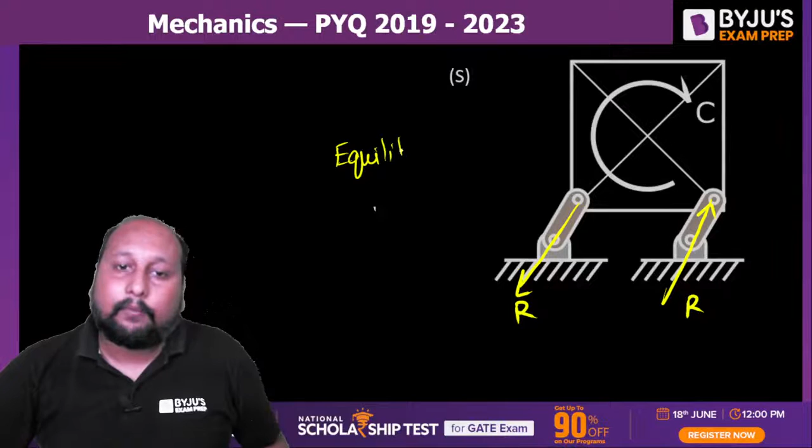Let's go with the last one, configuration S. If you see the 2 forces acting, if I assume this force acting like this, the other force will be acting in the anti-clockwise direction. Basically, one force will be upward and the other downward. So I can say this is clockwise, and we have to create an anti-clockwise. This is your R, this is your R. So net force equal to 0, and these two reaction forces will create an anti-clockwise moment, so the clockwise couple will be nullified. So this is also an equilibrium condition. So I can simply say all these three options B, C, D are the correct answer. B, C and D, all three are correct.

Clear? Fine, understood. Let's move on, next question on the screen is from the same topic, a very easy question.

Quickly, a rope with two massless platforms at its two ends passes over a fixed pulley as shown in the figure. The discs, with narrow slots, have equal weights of 20 Newton each. That means we have discs, each weighing 20 Newton. The number of discs placed on the left hand side platform is N and on the right hand side is M. It is found that for N equal to 5 and M equal to 0, a force of 200 Newton needs to be applied in order to initiate the upward motion on the left side platform. If F is removed, then what is the minimum value of M, referring to figure 2?

Okay, this is figure number 2, this is figure number 1. Prevent the downward motion on the left hand side platform. Okay, very easy, very easy.

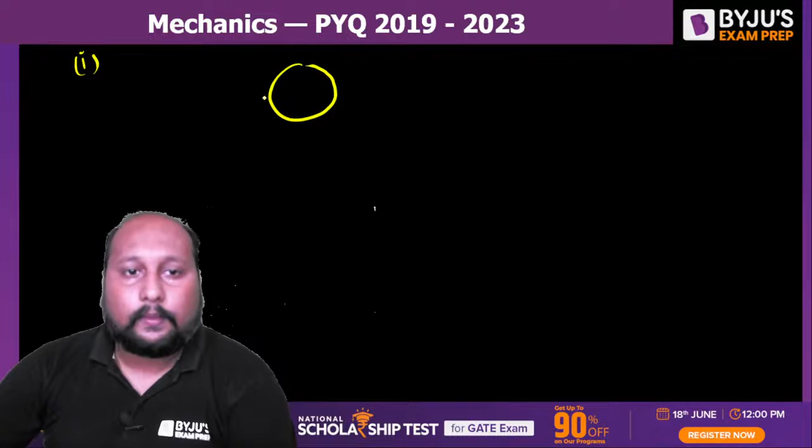Chalo. Now if you try to visualize the first diagram, first case, we are having 5 plates, each having a weight of 20 Newton, so it will be 100 Newton. This is 100 Newton weight. And we are having a net force acting, that is 200 Newton being applied. This is 200 Newton.

So definitely this is not an example of pulley, this is an example of a belt drive. Let's say this is T1, and this is T2. So the angle of contact will be exactly 180 degrees. Can we say that T2 by T1 is equal to e to the power mu into theta? T2 is 200, T1 is 100, e to the power mu value we need to calculate, theta is 180, that is pi. Solving this, let us calculate the value of the coefficient of friction.

Let's calculate, this is ln2 divided by pi. This is 0.22. 0.22 is the coefficient of friction.

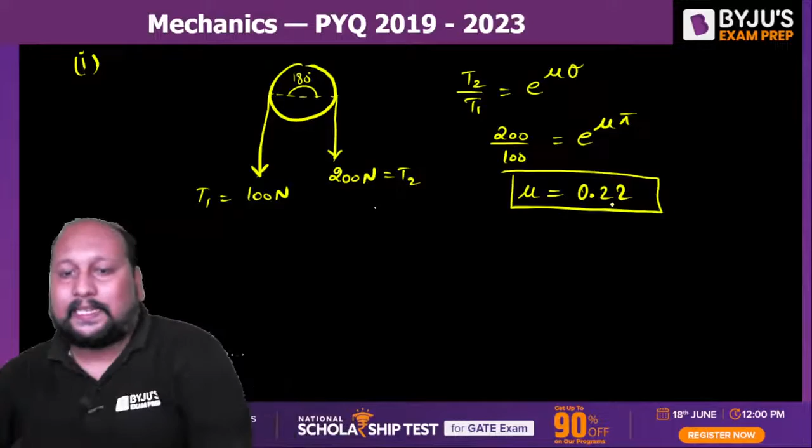Now consider the second case. In second case, we are removing this 200 Newton force. We are not applying 200 force, we are applying M disc. So we need to see how much M disc we need to apply. So same problem, the same disc, that means 100 Newton is still present.

Now there's a force, let us say T3 being applied, and definitely this will be having a 180 degree angle of contact. So I can say this is T1. So how much we need to apply in order to have downward motion on the left hand side platform?

Chaliye bataiye. So I can simply say that T3 by T1 is equal to e to the power mu into pi. T3 we need to calculate, T1 value is okay. We have to go downward on the left hand side, so that means your T100 will be moved. So this is 100 by T3 is equal to e to the power mu into pi. So T3 will be equal to 100 divided by e to the power 0.22 into pi.

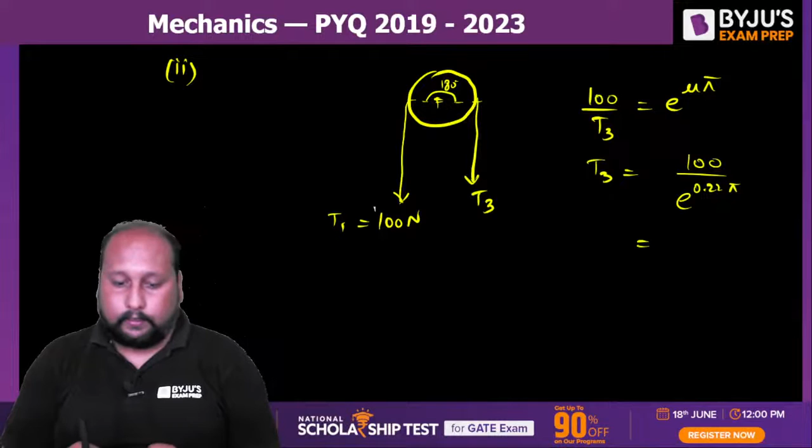That means on this T3 we are stacking M disc, and each disc having a weight of 20 Newton. So there are M disc being stacked, which is having a total weight of 50 Newton, each disc having 20 Newton. So number of M disc will be equal to 50 divided by 20, that is 2.5. Practically it's not possible to have a decimal, so we can go for the next integer, that is 3. So the final answer is 3.

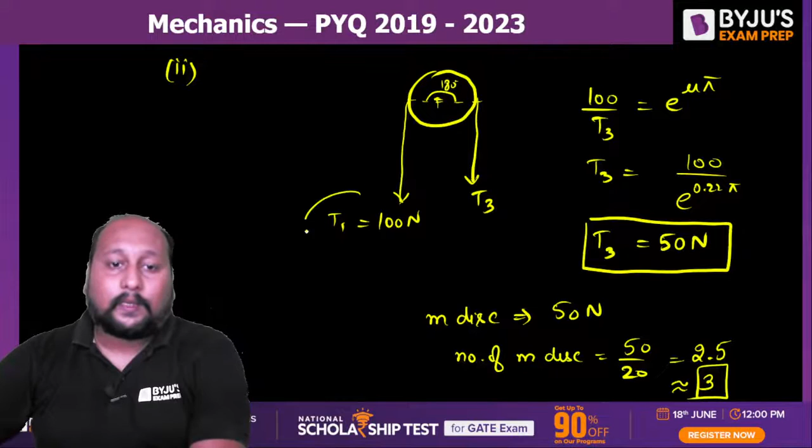Final answer is 3, okay? Because we have taken this left hand side to move downward. In the previous case, it was to initiate the upward motion of the left hand side. Left side upward motion means this is a slack side, this is tight side. Left side downward motion, this is the tight side, this is slack side. So from this I am getting number of M disc is equal to 3, a simple question from the concept of the belt drive. Okay, 20th question on the screen.

A rigid homogeneous uniform block of mass m equal to 1 kg, height h equal to 0.4 meter, width b equal to 0.3 meter, is pinned at one of the corners and placed upright in a uniform gravitational field, supported by a roller support configuration. A short duration impulsive force.

So basically we are applying a very small amount of impulsive force like this. Due to this very small impulsive force, it will be having some tilting motion. So they are saying what should be the minimum value of this impulse required to topple the block. That means how much minimum impulse force we need to apply so that it is just on the verge of toppling down. That we need to calculate.

So what we can do is, let me draw the diagram. Better I can draw the diagram, that will be much more easier for you guys. Or let me do one thing. This is the center of gravity. Okay, chalo, let's do one thing. Let us draw it over here.

So initially it was placed over here. This was a hinge point, and there was a roller support being placed, something like this. Okay, let's say this is the G point, and there's a force being applied exactly at the point over here.

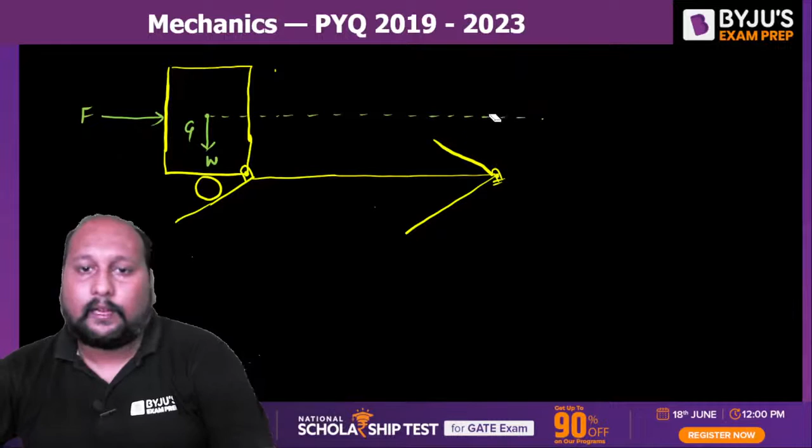There's a very interesting question asked from the impulse momentum, impulse force concept. We are applying the force so that it is just sufficient enough to topple down. Can I say that when you are applying this impulse force, it will be having a configuration such that its G value has been shifted, or it is being moved a bit ahead like this.

Okay, this is your new position. This is your weight W acting exactly from here. What are the dimensions that we are having? The height is 0.4 and width is 0.3. This is 0.3, this is 0.4. Height is 0.4, right?

So can I say when it has shifted to this point, can we calculate this new height h dash? Yes or no? If you try to visualize, this is the center point. So this will be half, that is 0.15. This distance will be 0.15 and this height will be 0.2.

So from here, let's say this is O, I can say OG dash, let's say this is G dash. OG dash is equal to root of 0.2 square plus 0.15 square. Let's try to solve it and see what value we're getting. 0.2 square plus 0.15 square, root of this is 0.25 - I think all dimensions are in meter only, 0.25 meter.

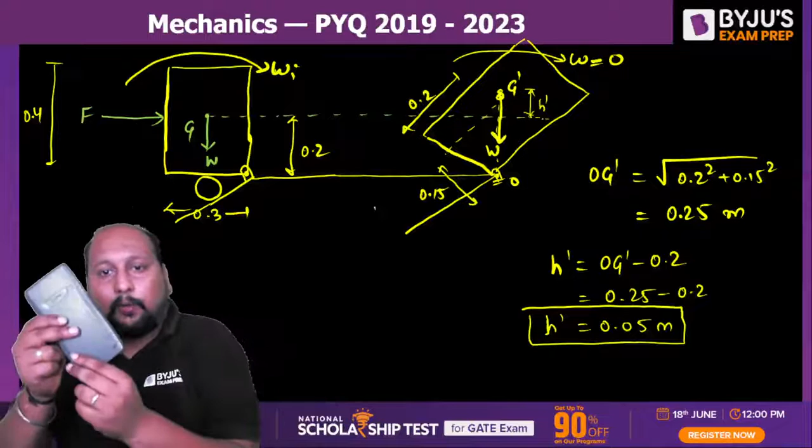At this point, when the center of gravity does that, the weight is passing through the hinge point, at that point your omega is 0. If you apply a slightly more value, it will topple down. So we are talking about the verge condition. So from here I can say that is equal to m into g into h dash.

Yes, fine. So what is this one? I naught we need to calculate. So if I talk about I naught, will be equal to - this is a rectangle, right? We need to calculate the moment of inertia. Let me use this side.

This is O. So what is the moment of inertia at this point, from one of the edges? That will be equal to 1 by 3 into height square plus breadth square. So this is 1 by 3, height is 0.4 square, breadth is 0.3 square. Let us solve it and see what value of I naught we are getting.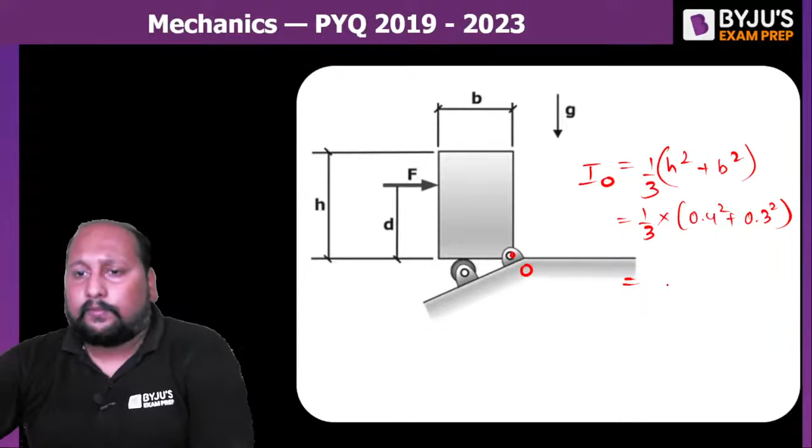4 into 1 by 4, that is 1 by 12. So the I naught value we are getting is 1 by 12 kg meter square. So placing this value of I naught and the initial angular velocity, we can easily identify it.

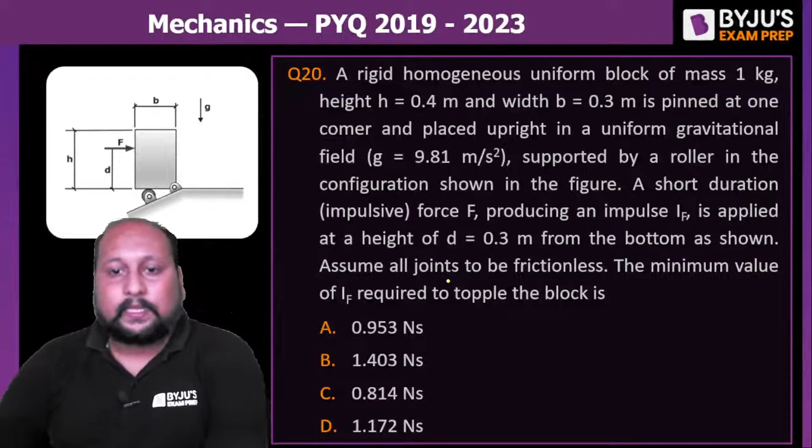Is this clear? So we can say this is 1 by 12. So half into 1 by 12 into omega initial square is equal to m. What's the mass of this block? Mass is 1 kg. 1 into 9.81 into h dash is 0.05. So the initial value of angular velocity, let us calculate the direct value. It is equal to 3.43 radian per second.

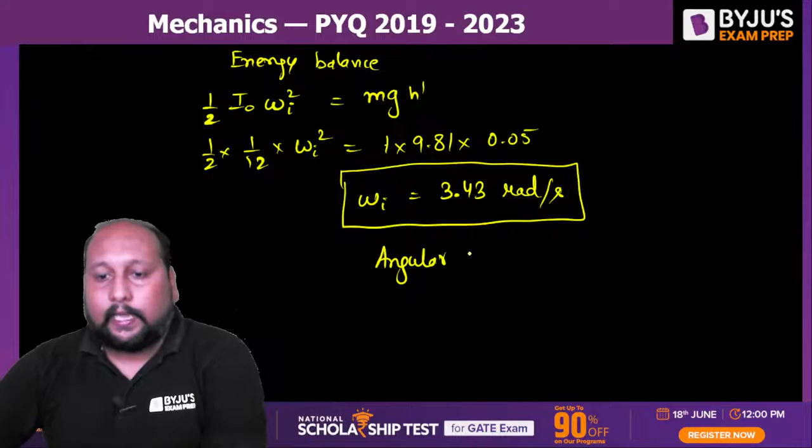Now we can say the angular impulse is equal to the change in angular momentum. So the impulse, we are applying at a height of d, we are applying at a height of 0.3. This is equal to change in momentum, I naught into initial angular velocity, the final angular velocity. This is equal to 0.

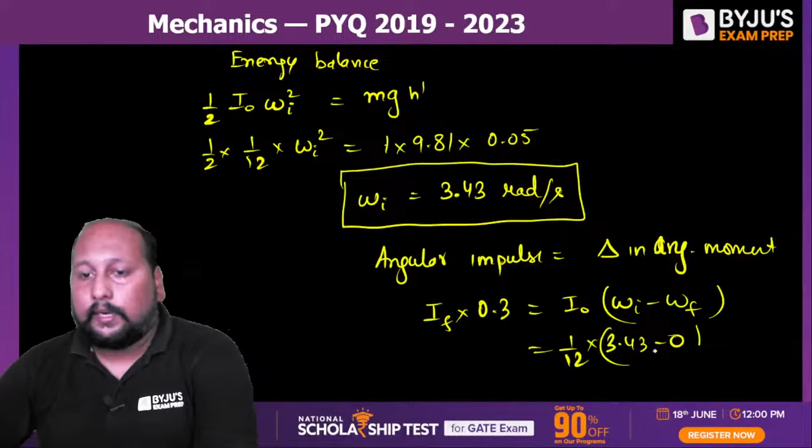1 by 12 omega is 3.43 minus 0, this is IF into 0.3. So from here, IF is coming out to be 3.43 divided by 12 into 0.3. What value are you getting? Quickly. 3.43 divided by 12 divided by 0.3. So 0.09527... okay, not 0.0, 0.9.

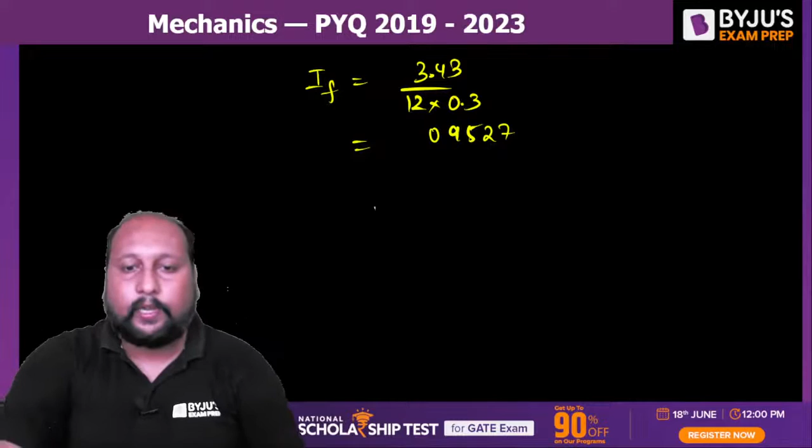0.9527 Newton second is the answer that we are getting. Are we having any option over here? Yes, option A, 0.953. 0.953 Newton second is the final correct answer. Option A is the correct answer. Clear? Done. Next question, 21st question on the screen.

A spherical ball weighing 2 kg is dropped from a height of 4.9 meter onto an immovable rigid block, meaning that rigid block is not moving. If the collision is perfectly elastic, what is the momentum vector of the ball in kg meter per second just after the impact? Take the acceleration due to gravity as 9.8 meter per second square. Options have to be rounded off to 1 decimal. So very easy question.

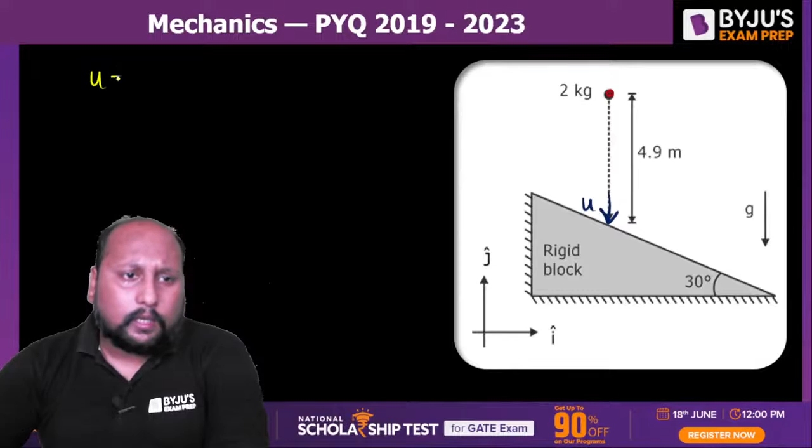So basically we are having a mass falling. First let us calculate with which velocity it will be hitting that particular rigid block. It is being dropped, so initial velocity equals 0. Let us suppose it is hitting the block with velocity u. So we can take v square equals u square plus 2as. So u is equal to under root of 2 into g into h, so 2 into 9.8 into 4.9, root of this will be 9.8 meter per second. That means this 2 kg spherical ball is hitting the rigid block with a velocity of 9.8 meter per second.

So what we have to do is draw the line of impact. Let us suppose this is the line of impact, at an angle of 30 degrees. If it is hitting, after the collision it will be moving, let us suppose with velocity v. I don't know where it will be moving, let's say it's making an angle theta with the line. But the one thing they have given is that it is a perfectly elastic collision.

That means if I take along the line of impact... this is the line of impact. Applying along the line of impact, can we say u cos 30 degree is exactly equal to v cos theta, and perpendicular to the line of impact, u sin 30 is equal to v sin theta? Solving equation 1 and equation 2, since u is equal to 9.8, we get u is equal to v is equal to 9.8 meter per second.

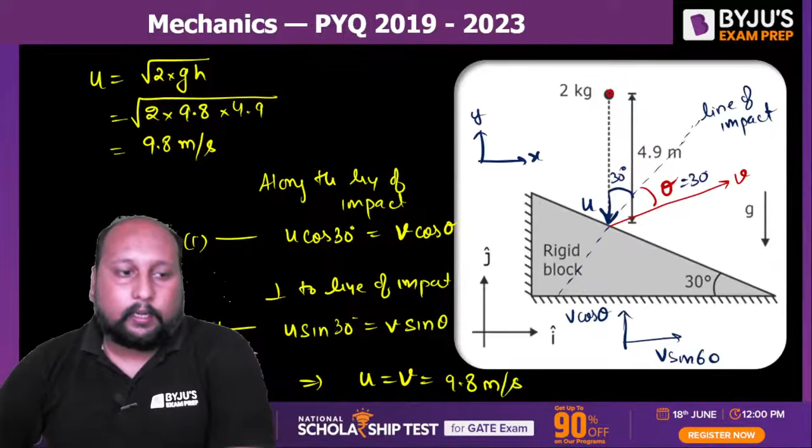We got the final velocity. So now we can say the momentum after the impact, that will be equal to m into v into... what is this complete angle? This angle is equal to 30 degree. If I calculate, theta is coming out to be 30 degree only. So I can say v cos, this is your y direction, this is your x direction, i cap and j cap. So we can say this is v sin 60 i cap, and in this direction we'll have v cos 60, so it will be mv sin 60 i cap plus mv cos 60 j cap.

So what's the mass? Mass is 2 kg. 2 into velocity 9.8, sin 60 is root 3 by 2, i cap plus 2 into 9.8 cos 60, which is 1 by 2, j cap. So this is 9.8 into root 3.

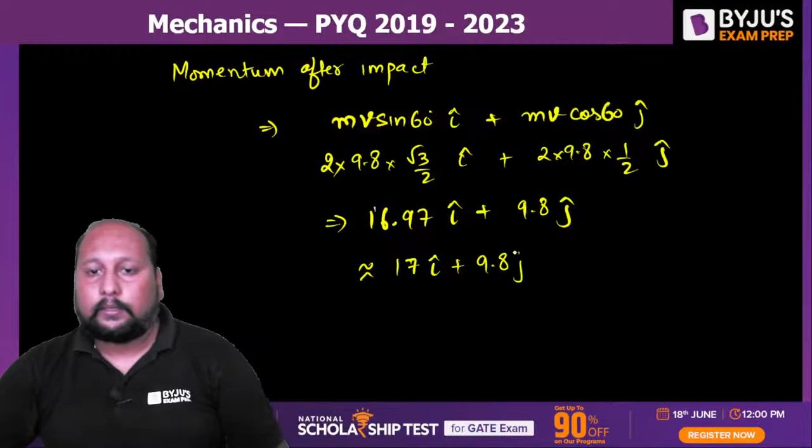16.97 i cap plus 9.8 j cap. So we can say this is rounded off to 17 i cap plus 9.8 j cap. Okay, so the correct answer is option C, right? Option C is the final correct answer. Clear hai?

Done. Chaliye, last question. From the concept of moment of inertia, area moment of inertia, we need to calculate for this linear tapered section.

We have solved this type of question in our paid courses also, number of times. So what we can do is, since this is symmetrical about the x-axis, I can say that this is basically a combination of a rectangle and a triangle. Let's say this is point O, this is A, this is B, this is C, this is D. So if I try to remove the triangular portion from the rectangle, I'll get half the moment of inertia, and multiplying by 2 will give the complete moment of inertia of this tapered section.

Okay, so what is this height? This is 3 meters. This height is 1.5 meters, and this is also 1.5, so the total is 3, and this width is 12 meters.

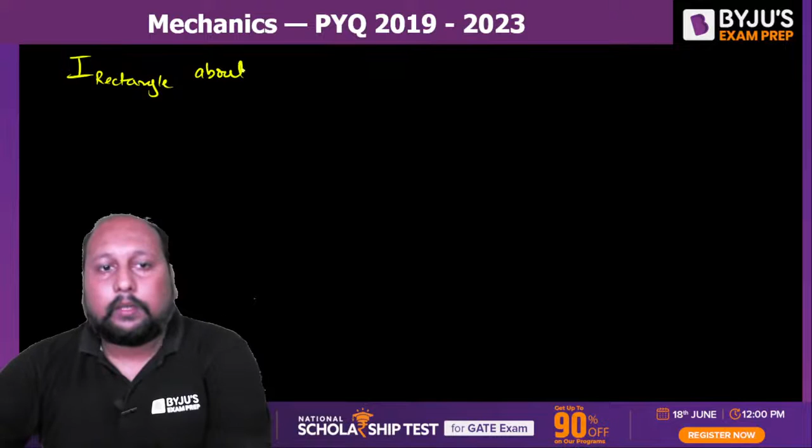So first let us calculate the moment of inertia of the rectangle about the y-axis, that means about this point, along OC. That will be equal to 1 by 3 B D cube. So that will be 1 by 3 into 3 is the depth, breadth is 12, so 12 cube. So this is 12 cube meter to the power 4.

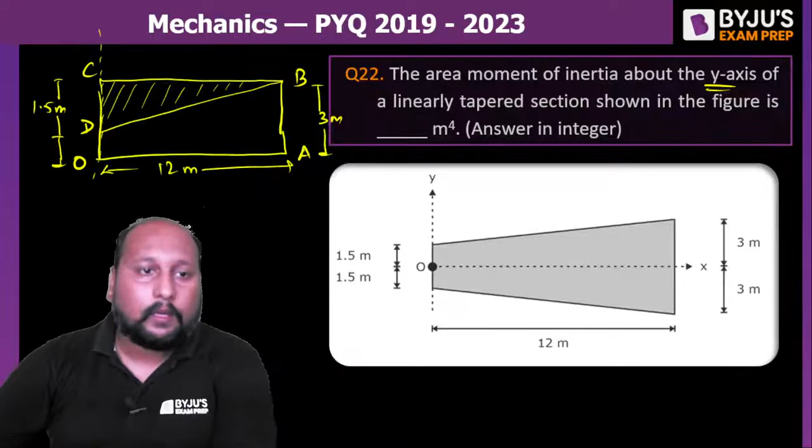And the moment of inertia of the triangle about y-axis, that is along OC or CD, is equal to 1 by 12 into base is 1.5 into height cube, which is 12 cube. So this is coming out to 1.5 by 12, which simplifies to 1 by 8 into 12 cube. Okay, so we have calculated for the half portion, the rectangle and the triangle.

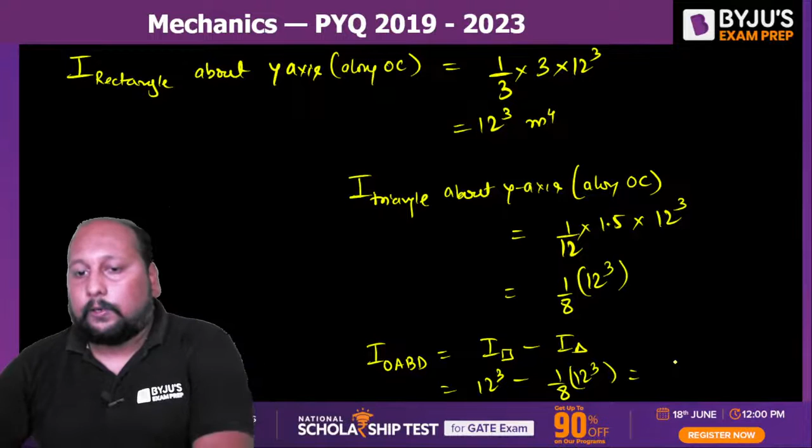So the moment of inertia of shape OABD is equal to the moment of inertia of the rectangle minus moment of inertia of the triangle, that is 12 cube minus 1 by 8 into 12 cube, which equals 7 by 8 into 12 cube. This is only for the half portion. If I want the complete whole section, the moment of inertia of the whole section will be equal to 2 into 7 by 8 into 12 cube, so this is 7 by 4 into 12 cube.

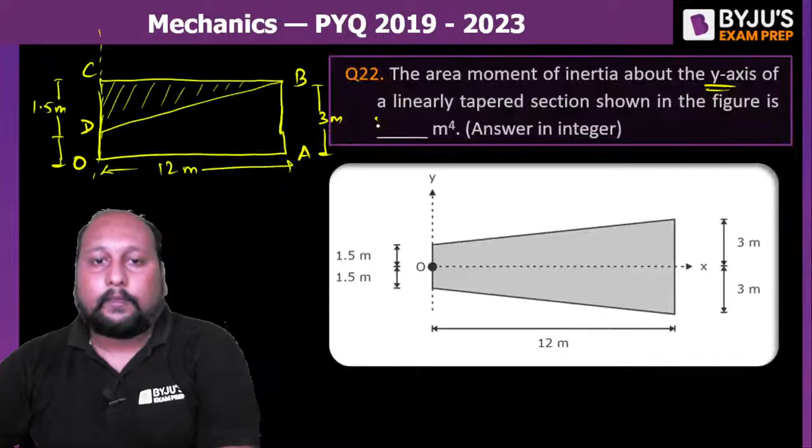So what is the value we are having? 12 to the power 3 into 7 divided by 4. So this is 3024 meter to the power 4. So this is the area moment of inertia, that is 3024 meter to the power 4.